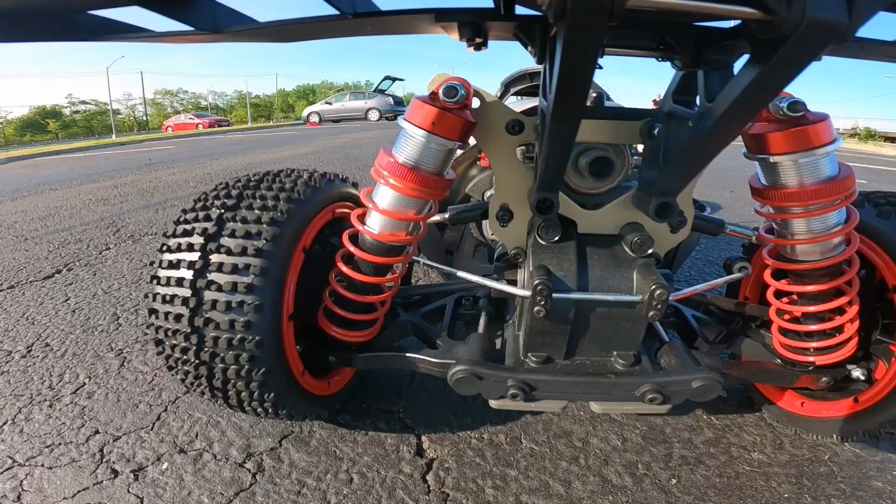What's going on, guys? This is a brand new fifth scale 30 Degree North gas buggy, and today we're going to be breaking it in. That's why, you guessed it, I have a little container of fuel out here. We're going to fire this up, do the proper break-in demonstration as recommended by the 30 Degree North manual itself, and then we will see just how great this truly sickening one-fifth scale gas buggy is.

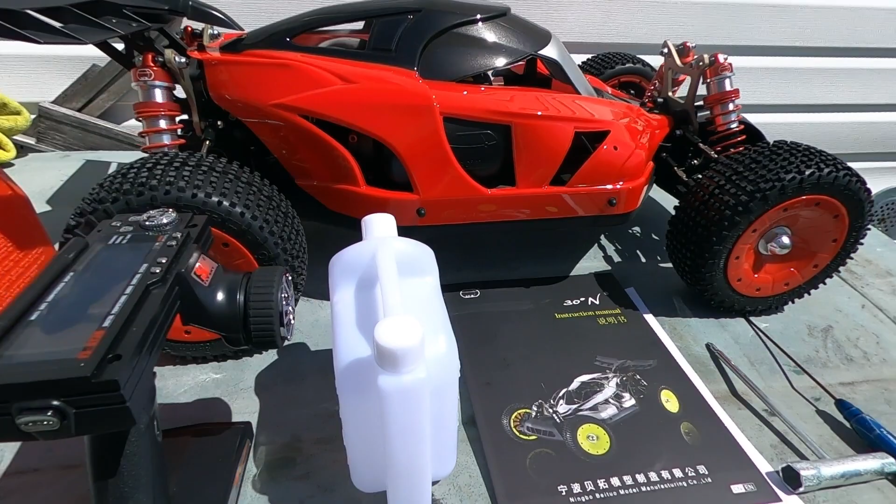Before we put some fuel in it, let's talk about what you first need to do to fire up any gas RC. You need a premix fuel jug. This is one that they include for you. Notice on the top left it says 25-to-1. This is a very convenient 25-to-1 fuel mixing container. Let's say you want to run a different ratio of oil, you also have a 50-to-1 mix graduation on the other side. Very handy. Pour oil here on the left, pour fuel here to the proper graduations in the center, and you're good to go. You're premixed.

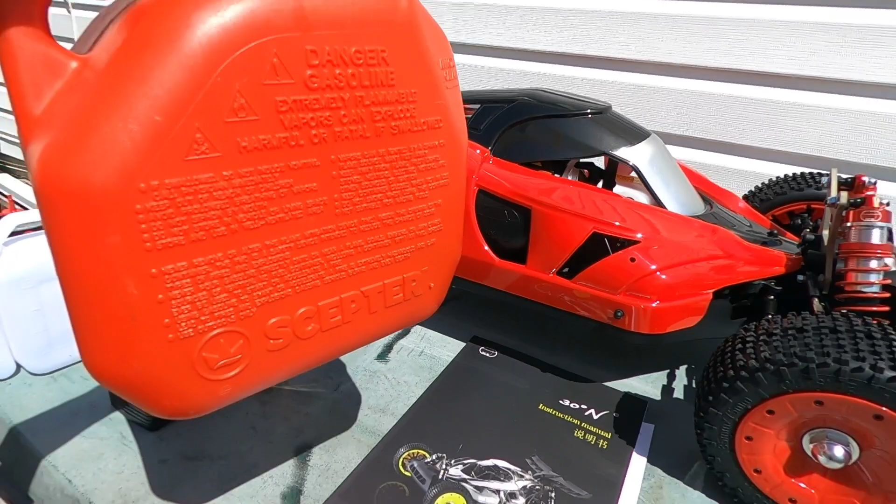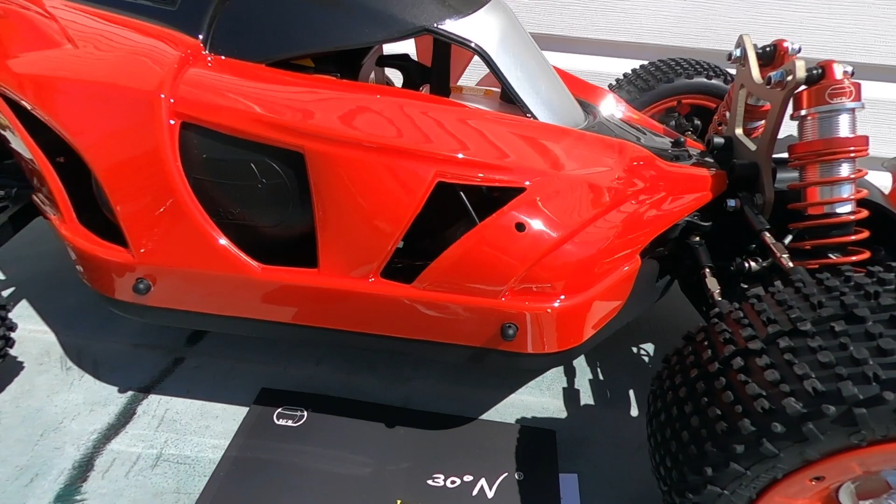Now for myself, I will be running fuel that I already have pre-mixed. Inside this container is ethanol-free, 100 octane, and proper 2-stroke synthetic racing oil, Klotz Benol. The best racing oil. Some people use Amsoil Dominator, doesn't matter. I will put a link to the proper oils you need for the pre-mix if you want to get them at Amazon. But what I'll tell you is the manufacturer does recommend, and we will do as recommended, because who are we not to listen to the manufacturer? Look at the sickening gas buggy they gave us for only $750.

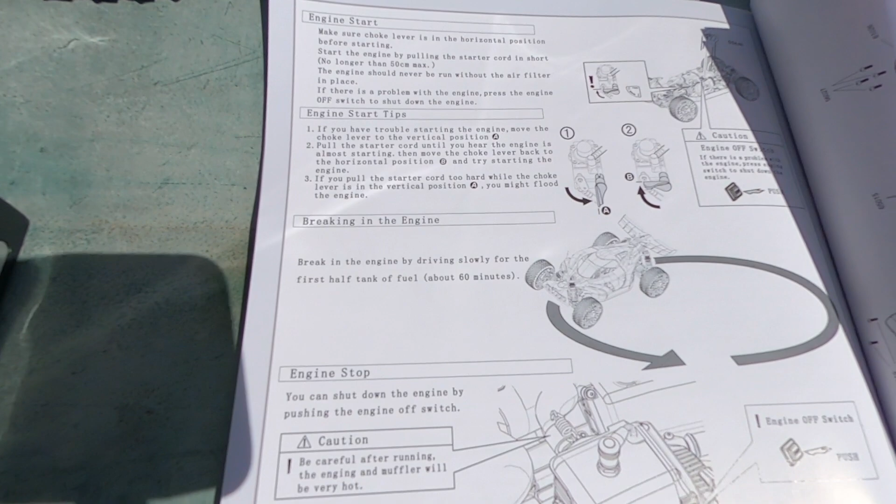If this is your first gas buggy and you're kind of clueless on what to do, don't worry. 30 Degree North here, instruction manual, very well written in proper English. I checked it for grammar mistakes and there are none. They go through a whole process on how to start the engine, how to prime the engine, how to use the choke lever if you can't get it to fire up.

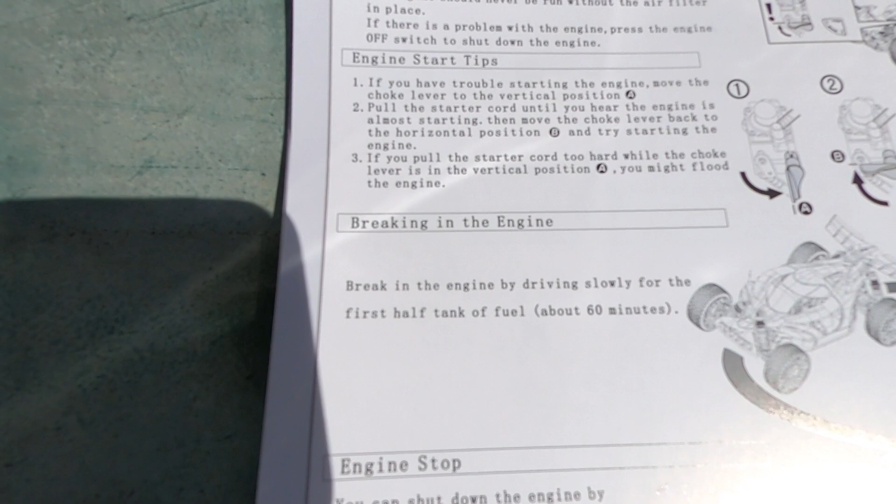What we care about is right here, breaking in the engine. It says break in the engine by driving slowly for the first half tank, about 60 minutes. Guys, half a tank takes 60 minutes? Well, that's some crazy, insane fuel economy. I kind of like how that sounds.

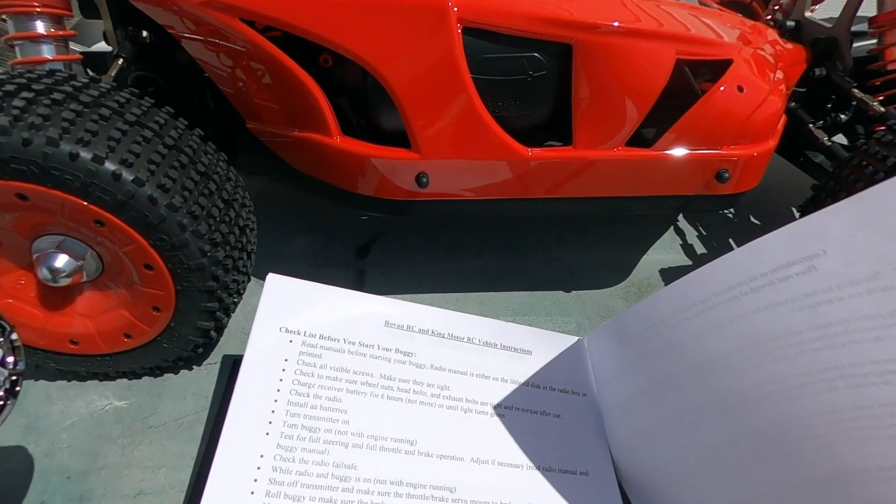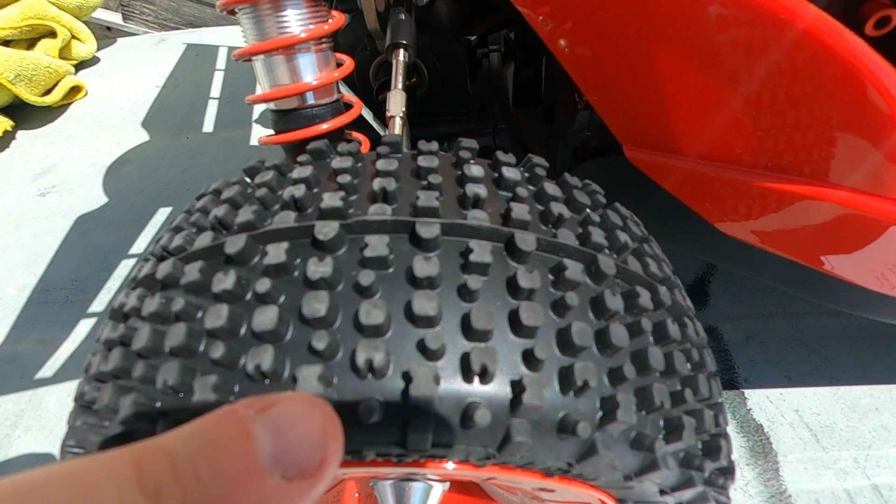Let's do a quick feature overview of the buggy itself, some of the things I think are most interesting. Look at the wheel tread design. Unless I'm mistaken, this is a mini Pac-Man design. You see this little pin? This is Pac-Man, guys, I don't know. I think this buggy likes the bit of the 80s retro video game scene.

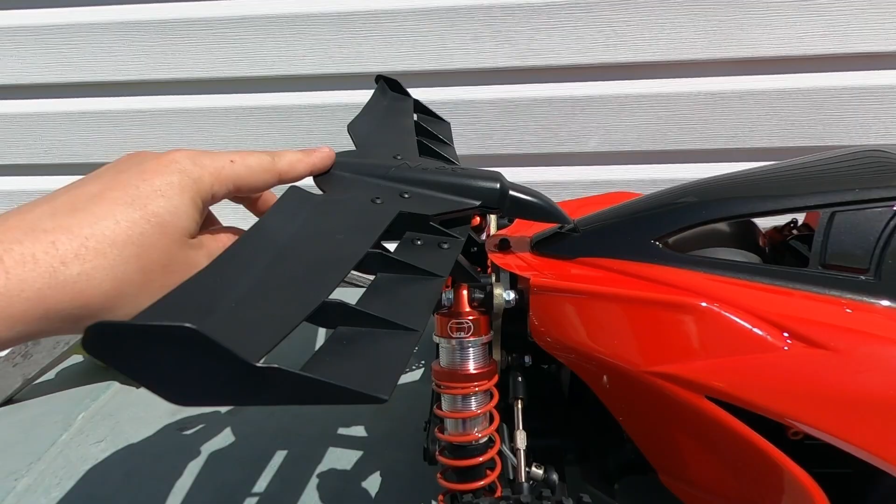What do you think? Another interesting notable feature, this wing. Not only does it look like you're on a Boeing 747, but notice this: this is what they call the breakaway design. It's quite common to flip things - you know, flip money, flip stock, flip your ex-girlfriend. In this case, when you flip a gas buggy, which is pretty heavy, this provides a little bit of shock absorption dampening for the wing, and then it pops back right into place.

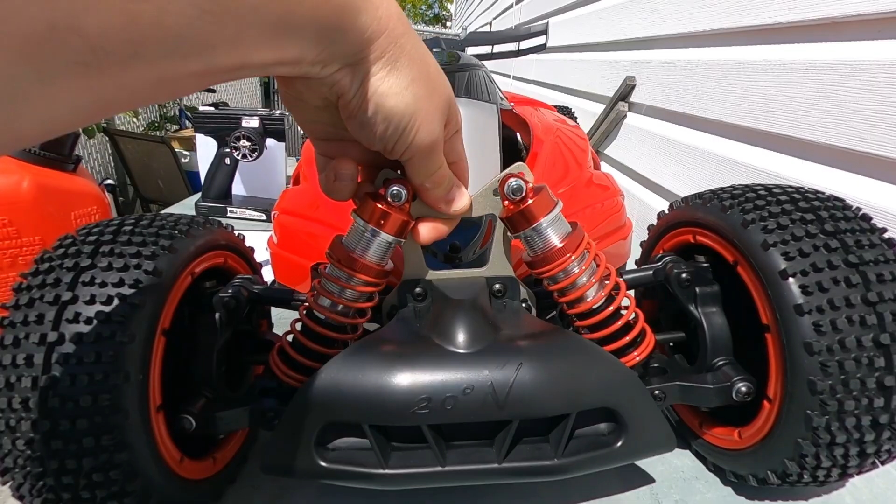In the front, you also have a very large functional bumper with giant oil-filled aluminum shocks with very good dampening. And the attention to detail on this 30 Degree North brand is insane.

Look at that logo, they even have it etched on the shock caps. It's also on every single enclosed wheel nut. If you want to remove this outside wheel cover, it can be removed and you'll have like a regular rim on the inside there. But honestly, I like the way this looks. It keeps the dirt out, so why would you remove it?

Another interesting feature about this chassis, the body is incredible looking. Now tell me this is not one of the coolest buggy bodies you've ever seen in your life.

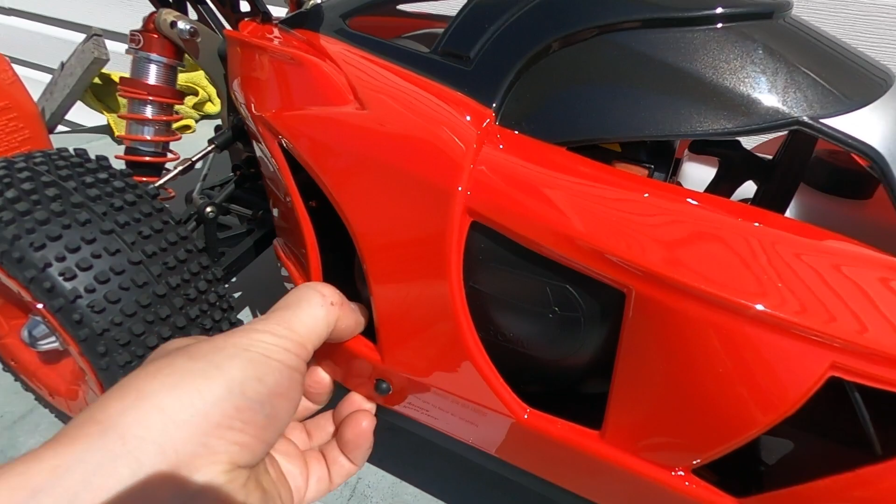As you get a little close, you can kind of see a giant fat pipe in there. Yeah, that's right, there's a giant fat, silenced, tuned pipe, guys. Should we take the body off and examine it? And then, I guarantee you, we will fire it up.

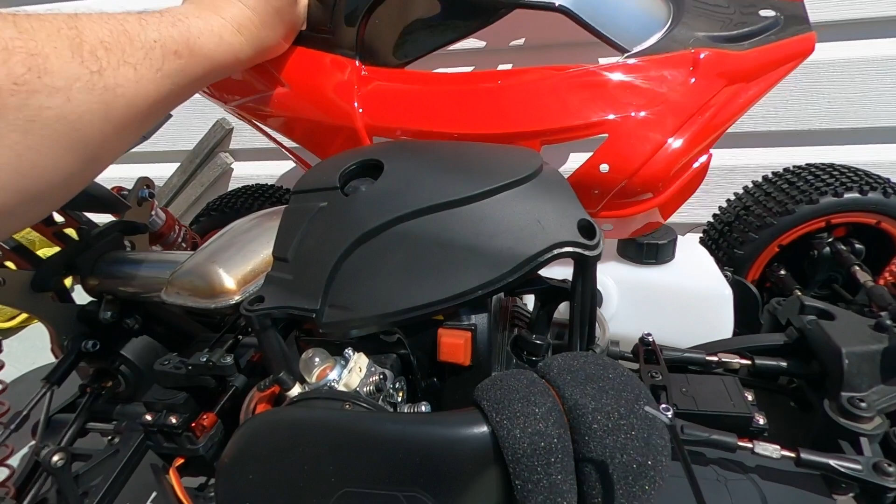Body comes out fairly easy. Look at that, one-handed body removal. This is a lot of body cutouts for venting, for cooling, for drawing air in, and then throwing that air out the back of that silenced, tuned pipe.

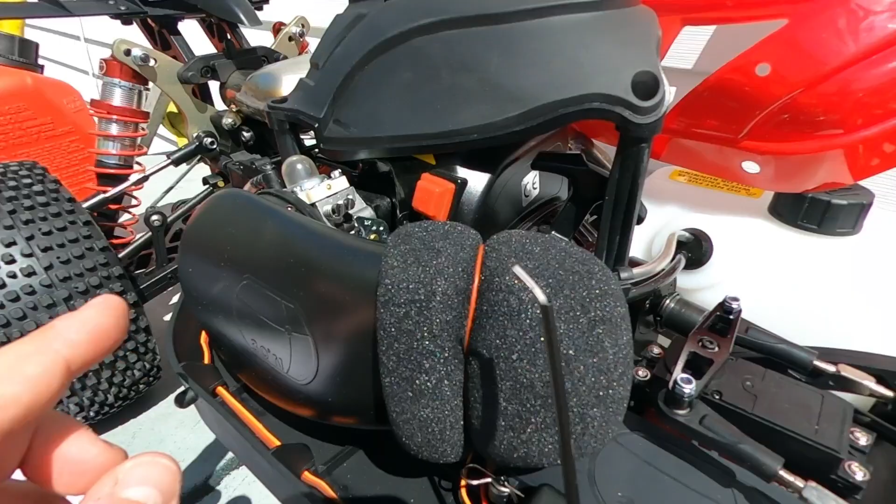We have a Walbro 997 Carb. Under this engine rollover protection system, there's an NGK plug, a giant air intake system with dual foam elements on the outside here. You should oil the inside one.

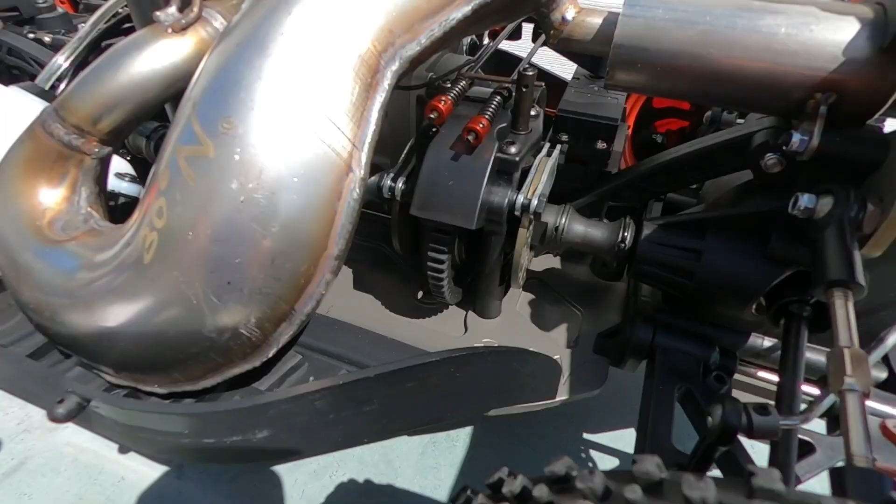We have incredible servos rated at 54 kilograms and a very fast transit speed. Push-pull steering setup with an aluminum servo horn. Notice I'm getting a little bit closer to the spur gear.

This is an actual legitimate spool, meaning it's not a center diff. I like that, guys. Why do you need center diffs? You like drifting? That means you don't want a center diff.

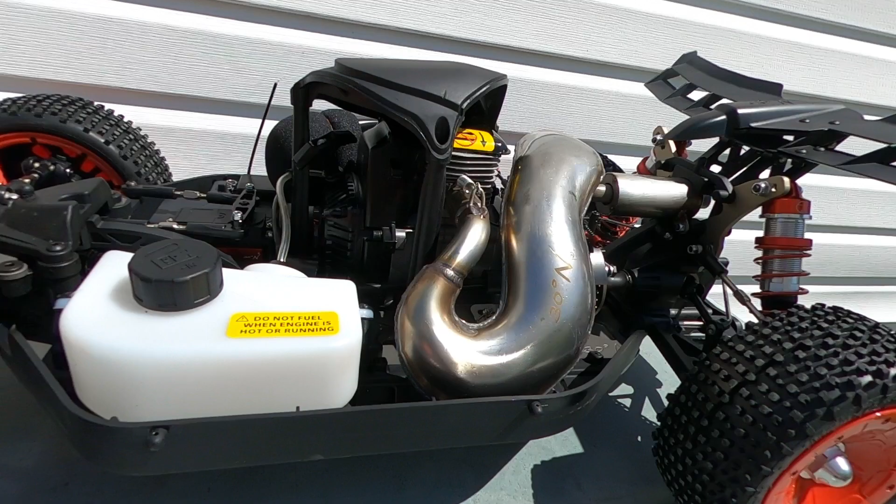Large capacity fuel tank. Everything on this buggy is top-notch, grade A, USDA quality. Gas ready to go. I like it. I think it's about time, enough with this little interview. Let's put some fuel in it.

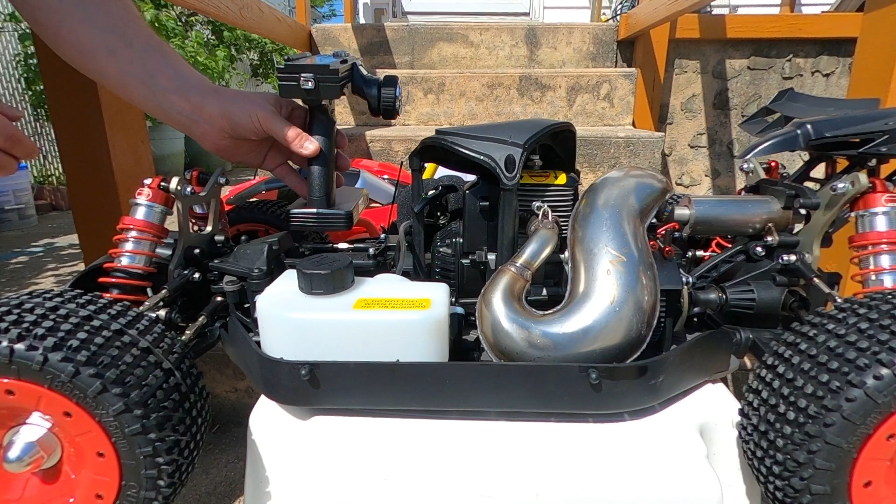Very important, you always check your fail-safe before you do anything. They even say it in the manual. Power the radio on and turn on the electronics. Steering check, we got power. Now I'm going to turn off the radio and we will see whether the brakes are applied. We got full brakes, the fail-safe is correctly set up.

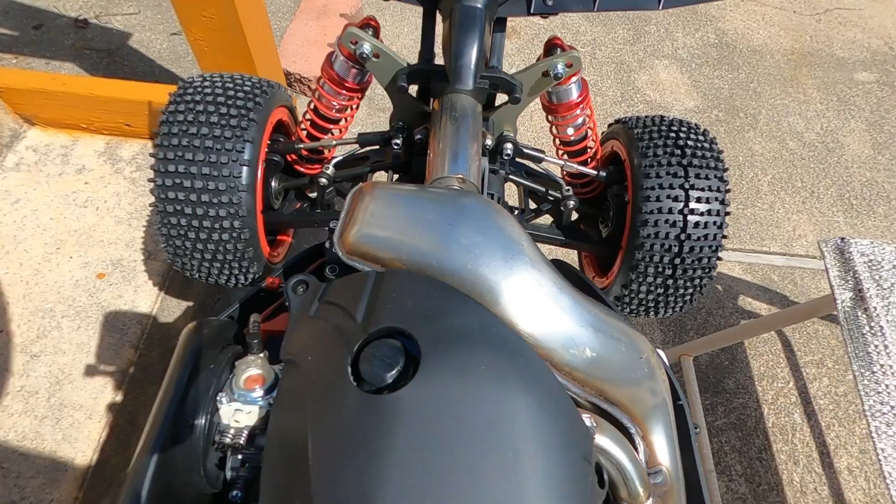We're good to go. In the future, we will get an external engine kill switch from Killer RC. But for now, we just have to fire it up, run the motor a little bit, check out how actually silenced this crazy pipe is. I like the way it looks. I already have my premix, ethanol free.

There we go, nothing like the first fuel pour. All right, we're not gonna put too much, about half a tank, that's all you need for now.

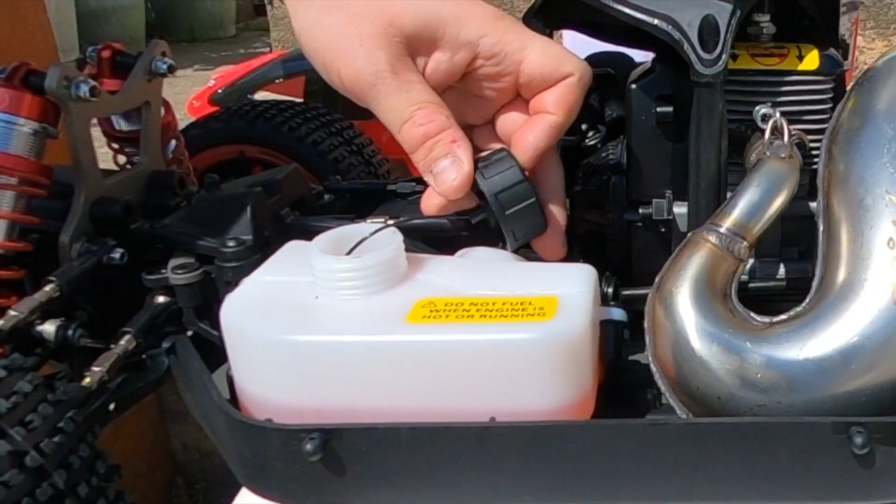Now this is going to be the very important part, the first prime. Going to press the primer bulb and eventually we will see fuel in the bulb itself. 1, 2, 3, 4, 5, 6, 7, 8, 9. Okay, there it goes, I see fuel. I'll give it a couple more.

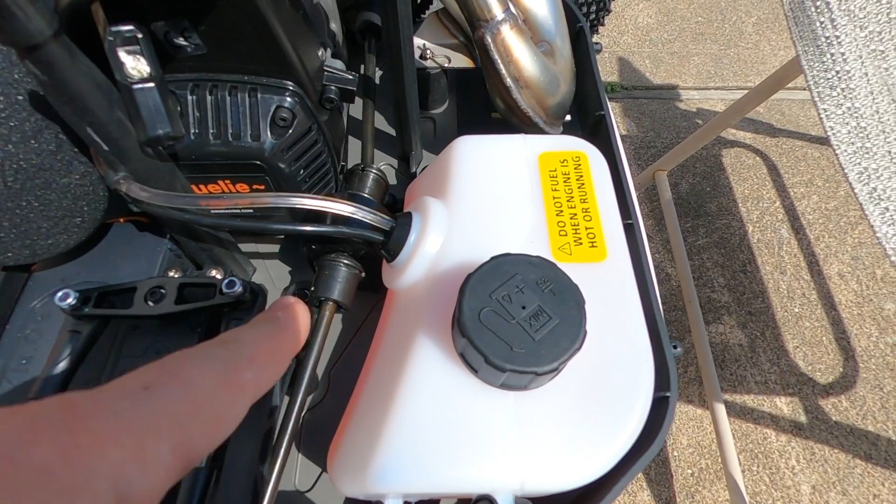That creates pressure in the fuel system. This does not put fuel into the motor. I want you guys to understand, this is just creating fuel pressure in the system. So when you actually do prime, by pulling the pull start here in very short pulls, that will draw fuel into the motor. Now notice I have the car elevated from the ground.

Whenever you fire up any new gas RC, always have the wheels off the ground. It's just a safety measure. You don't know the settings on the carb, although you should have checked them, and always have a proper tuning screwdriver ready to go. I checked them. The tuning settings on the carb were 100% correct.

Take the handle. What I normally do is just one pull like this about 10 times or so. Now this is new, so you really can't tell much. The first start is always kind of hard. We're also not using the choke.

If you notice, my choke is in the horizontal position. If it was in the vertical position, that means you would have the choke on, usually for cold climates. All right, a couple more small pulls, and I will attempt to do a bigger pull.

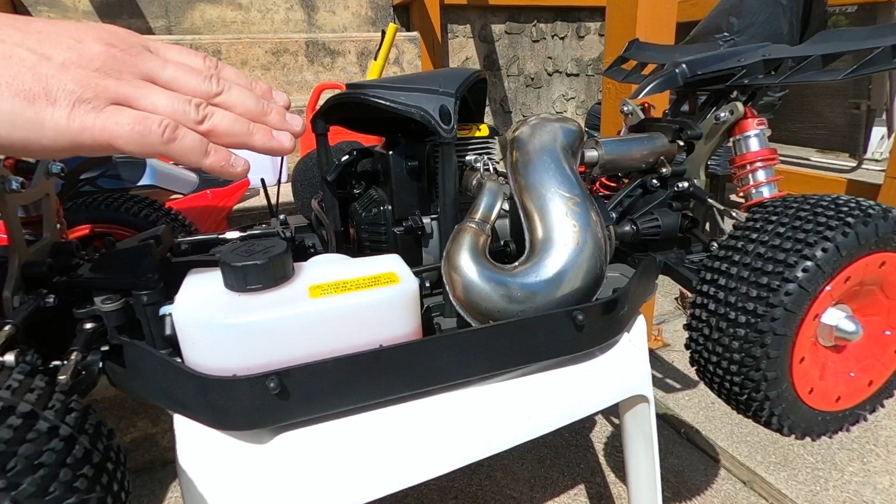This is just drawing fuel into the motor. Normally, when you feel it kick back a little bit, that means it's ready to go. I think it's primed. I am going to try longer pulls now.

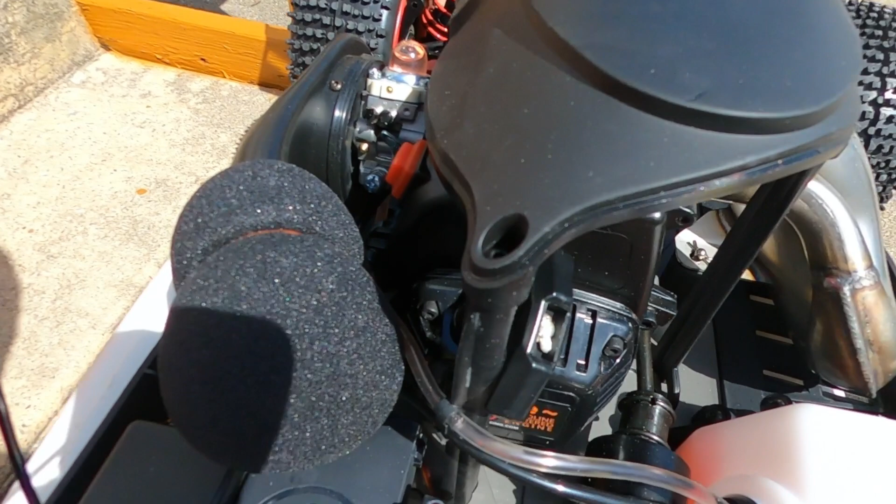If this happens, if you're pulling it and it doesn't fire up after a couple pulls, don't keep pulling it, because that's not what you're supposed to do. Here's the low speed needle on the carburetor. What I'm going to do is turn it to the right, and it should fire up much easier.

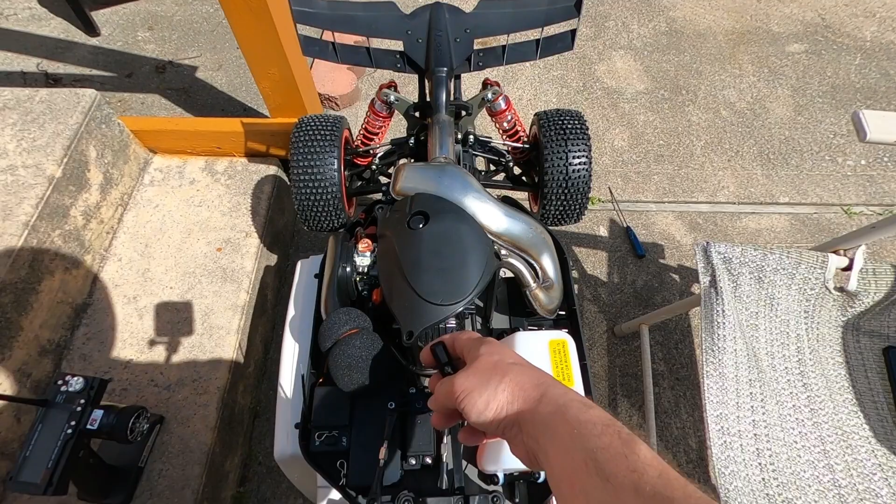Let's get it done, guys. We're gonna pull it. I have confidence in this. Oh yeah! Now that was a nice start. It's running nice and quiet, guys.

Silenced exhaust actually works. I can't believe it. This is a very...

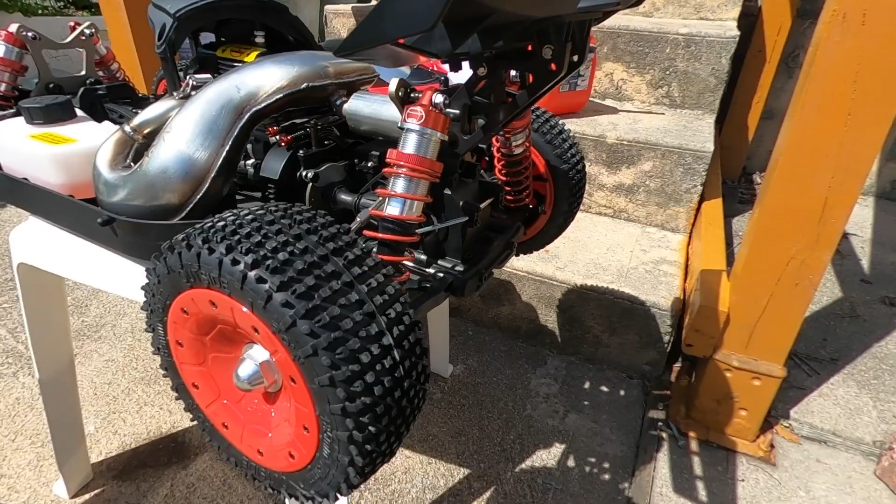If you ever heard of Baja in real life, you can't even really think. The 30 degrees north pipe, incredible.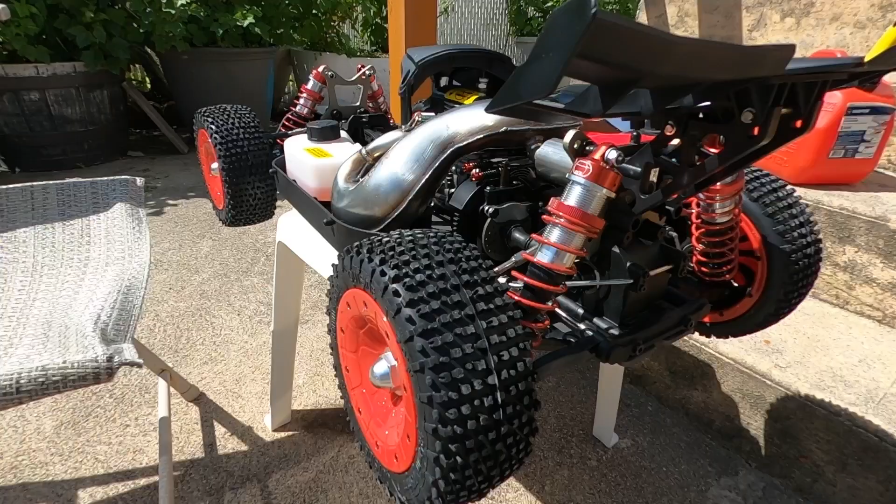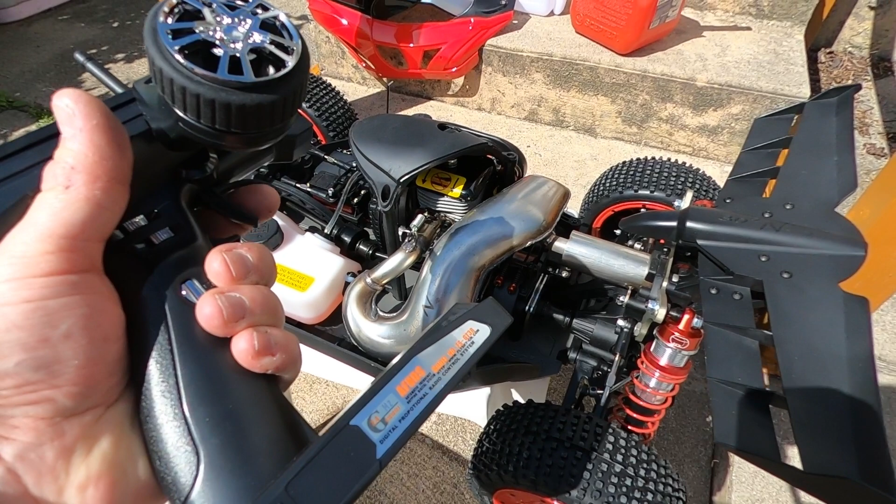Remote operation is terrific. Brake, the engine does not die. Very good throttle response, incredible.

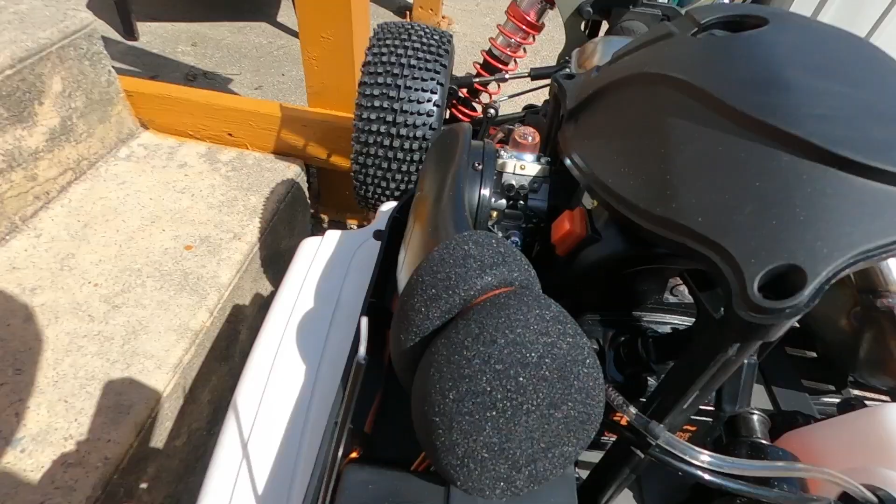Well guys, overall impressions? That was a very nice, easy start. I'm going to let it rest a little bit. I know the owner's manual said 40 minutes, but really I like to do about 10 minutes per heat cycle, about 4 to 5 of them, and you're good to go.

I gotta say, man, when they said this was a giant fuel tank, they really meant it. It looks like I have exactly the same amount of fuel as what I started with just now.

Overall sound and noise levels of this silenced tuned pipe are incredible. Nothing like the very loud Baja exhaust systems with those Dominator style pipes. This is actually quite tolerable. It's really not much louder than a basic T-Maxx 3.3.

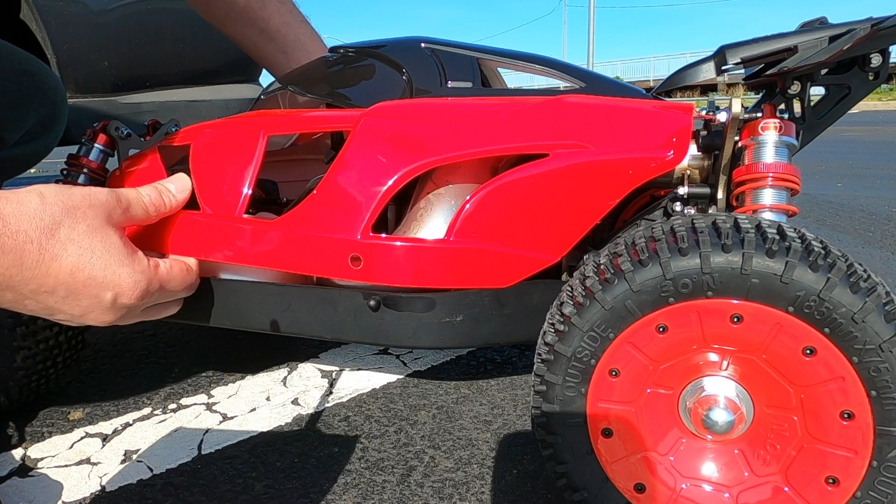All right, let's let it chill and we'll fire it up again. Let's do another heat cycle. I'm at a more open location and I'm going to just run it a little bit slowly.

System is on. Radio check is good. It should fire up relatively easy now. Maybe a couple very small primes and it should be a runner.

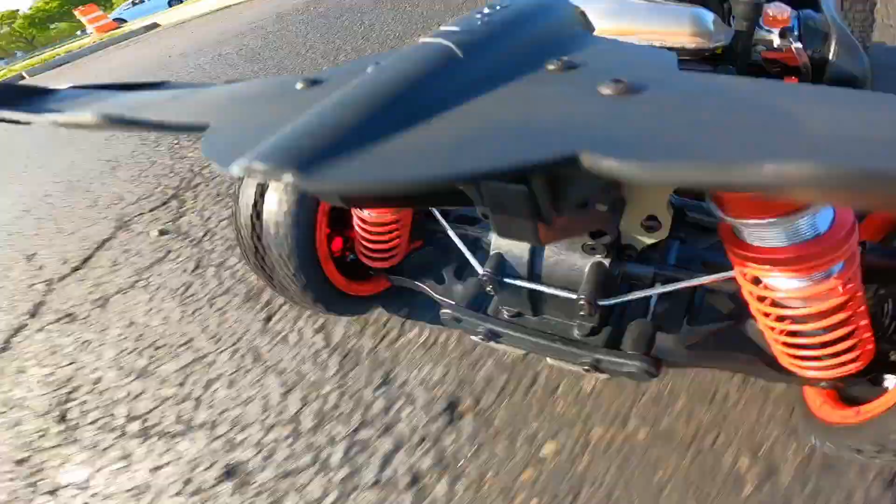I hope at least that looked cool.

Incredible buggy. I cannot believe how nice this thing drove. The brakes are phenomenal. I literally saw all four wheels lock up and provide awesome braking power. No center diff, I like it.

You guys saw I was doing a couple donuts with a 29cc gas, four-wheel drive, super heavy, sickening buggy. I cannot believe it. You don't need more power.

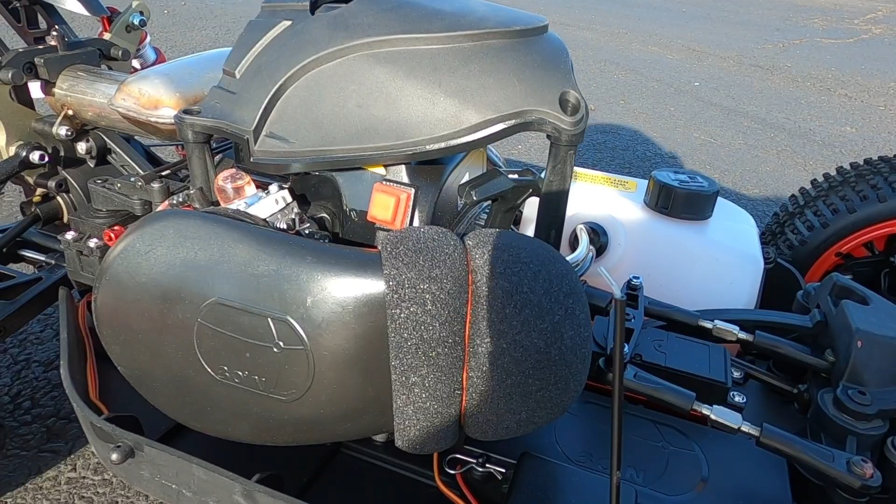This was not a speed run video. This was just checking out the electronics, making sure the brakes are set up correctly, all the basics that you do on basically any Nitro or gas RC.

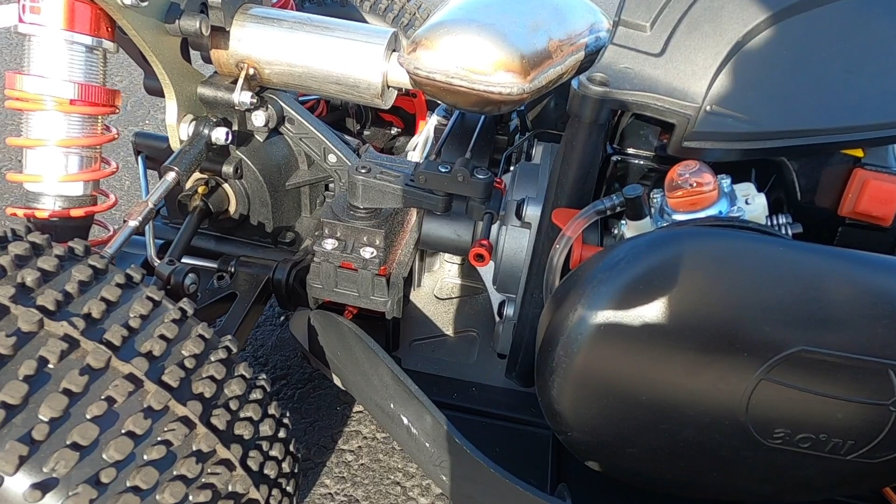Heat cycles are done, and next time we're going to do a proper speed test on this thing. So far, nothing has let me down. I am happy with the performance, and I don't know if you noticed, it really wasn't that loud.

Now keep in mind, I'm using some pretty state-of-the-art, top-of-the-line, crazy microphone audio system, also known as a basic GoPro, okay? Let me not trick you. This is just a GoPro recording, okay? I know a lot about cars, not cameras.

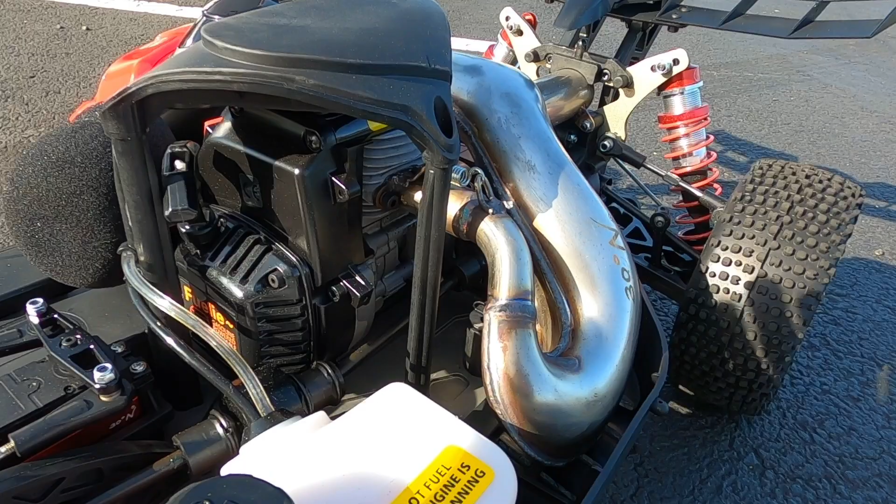Boom! If you smell what the Nitro Gang is cooking. Girl so fine, but her breath is like, ooh. She say she wanna dance, but she don't know how to move. Nitro World Order. Nitro World Order.